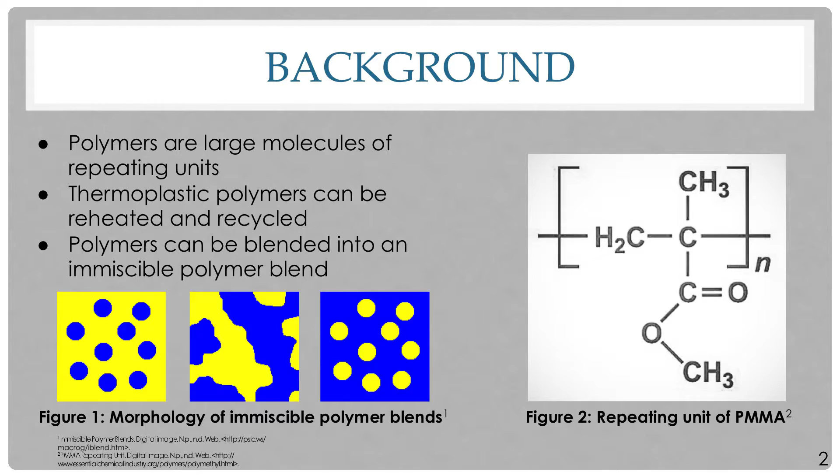The reason we chose to use latex paint for our polymer blend is because with an estimated 17 to 35 million gallons of unused paint left over each year, paint is the single most voluminous household hazardous waste material collected by local governments, and latex paint constitutes 50% of this estimated figure.

Financially, this poses a huge burden on the U.S. Municipalities have to pay a minimum of $8 per gallon in order to properly dispose of waste latex paint into landfills. And if all waste latex paint were disposed of properly, this would cost us about $275 million per year.

On top of this, since many consumers are deterred by the burdensome process of proper disposal, which consists of leaving the paint out to dry and making sure that no children, pets, or wildlife get to it, latex paint is often improperly disposed of into storm drains and bodies of water. This poses huge environmental concerns because the toxins and pigments found within the latex paint are extremely harmful to fish and other aquatic life.

As such, the purpose of our research is to mitigate the negative effects associated with the disposal of waste latex paint, while simultaneously creating a cheaper alternative to pure PMMA by creating an immiscible paint PMMA polymer blend.

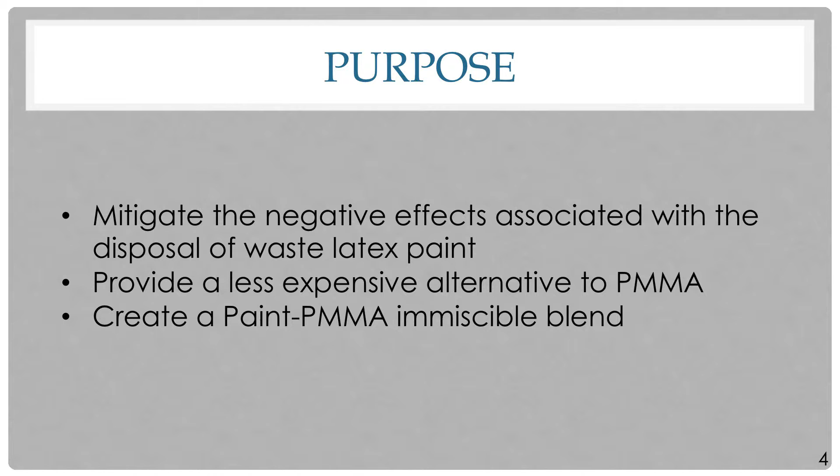We began our research by preparing the latex paint and the PMMA for injection molding. The latex paint was first collected from paint collection systems and then was ground into flakes. The latex paint was then put into a vacuum oven at 25 degrees Celsius for 24 hours. The PMMA, on the other hand, was already in the form of granules, and it was placed in a mechanical oven at 85 degrees Celsius and was run for 24 hours to remove any water molecules that may have been absorbed.

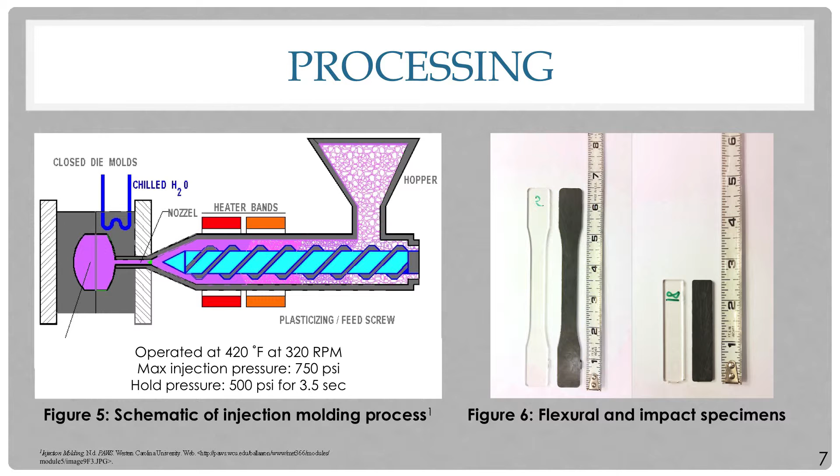The injection molding process is used to mass produce plastics of various sizes, shapes, molds, and designs. This process was run at 420 degrees Fahrenheit and at 320 RPM to produce our flexural and impact specimens. Using the flexural specimens from the injection molding process, we ran a 3-point flexural bend test following the ASTM D790 standards set by the American Society for Testing and Materials.

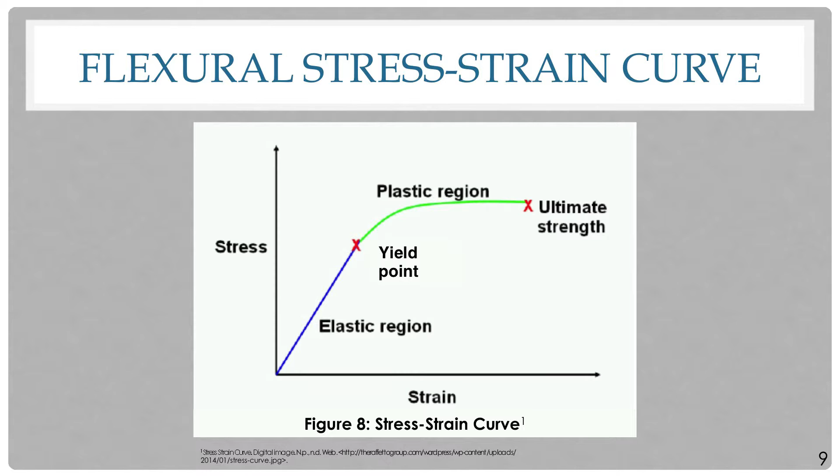Also in the elastic region, elastic deformation occurs. This is bending that occurs as a result of a load being applied to a polymer. But when the load is removed, all bending will fully recover. Past the yield point though and into the plastic region, plastic deformation begins to occur. This is not recoverable regardless of whether the load is removed. The polymer can still withstand some stress and strain though before ultimately reaching fracture point.

The next test we performed was an Izod impact test based on ASTM standard D256. We prepared our specimens by notching and measuring them, and each sample, of which there were 2, was composed of 10 specimens. In order to perform our impact test, we placed a specimen in a vise and swung a pendulum in order to fracture the specimen.

By measuring the speed of the pendulum at each point in the swing, we were able to calculate the energy absorbed by the material during crack propagation. This tells us the impact resistance of the material.

Differential scanning calorimetry, or DSC, is a method of thermal analysis that involves heating a specimen, cooling it back down, and then heating it back up again. We use DSC to determine the glass transition temperature of PMMA. Below the glass transition temperature, an amorphous polymer will act as a glassy and rigid solid, while above its glass transition temperature, it will behave as a rubbery and ductile solid.

In contrast, for the 20/80 paint PMMA blend, we used MDSC, or modulated DSC. The difference between MDSC and DSC is that MDSC includes temperature modulations, and what those are is local temperature oscillations that occur even as the average temperature steadily rises.

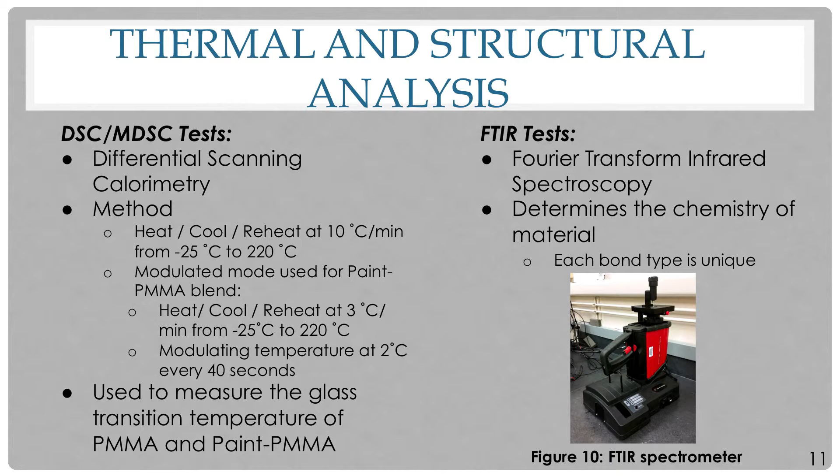Fourier transform infrared spectroscopy, or FTIR, is a method of determining what type of bonds are present in the material. What happens during the test is that infrared light is emitted into a sample. And as this light is emitted at varying frequencies, the percent transmittance is recorded. We use this data to determine the chemistry of the material.

After collecting and analyzing our results, we were able to generate a stress-strain curve for each sample. According to ASTM standards, at least 5 specimens must be tested for flexural testing. For our paint PMMA sample, however, we tested 7 specimens to verify our results because 2 specimens broke as a result of contaminants found in the paint.

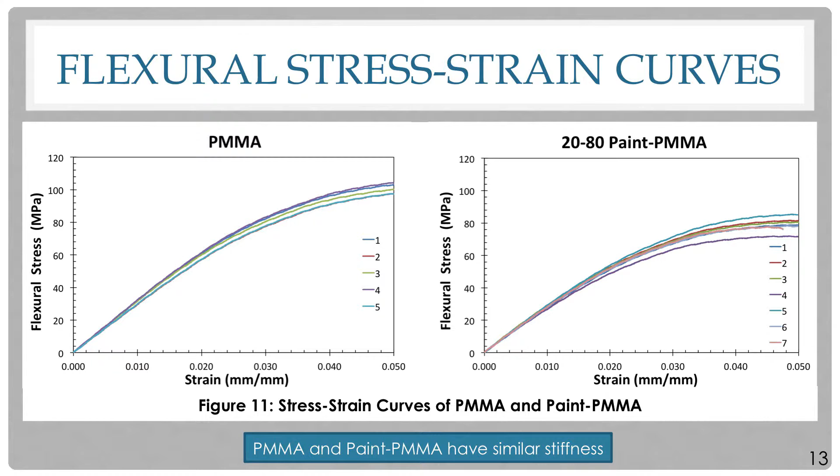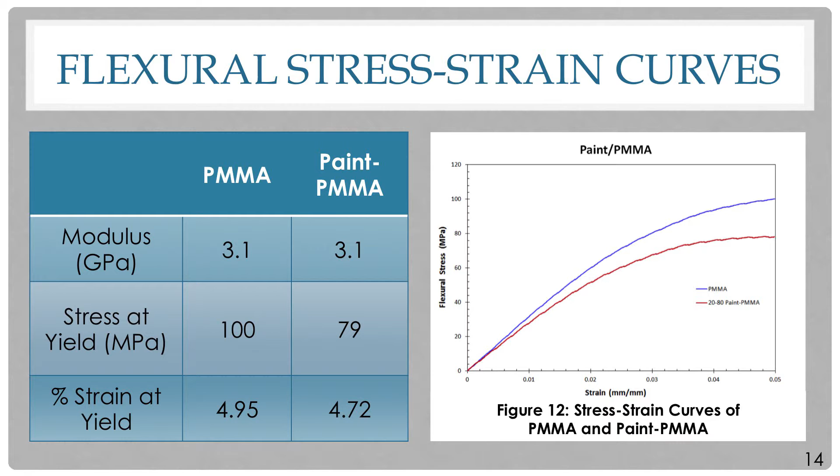If we take a look at figure 12, one representative specimen was selected to best represent our data. At the end of the curve, the stress at yield can be found, which is an indicator of the flexural strength of the material. The red curve, which represents a 20/80 paint PMMA, is actually below the blue curve, which is PMMA, and thus the flexural strength of the paint PMMA polymer blend is less than that of the PMMA.

Transitioning to the table, the modulus of elasticity is shown. Modulus of elasticity is an indicator of the material's stiffness. Since both values are the same, 3.1, the stiffness is retained in the polymer blend, even though a waste latex paint was incorporated in it.

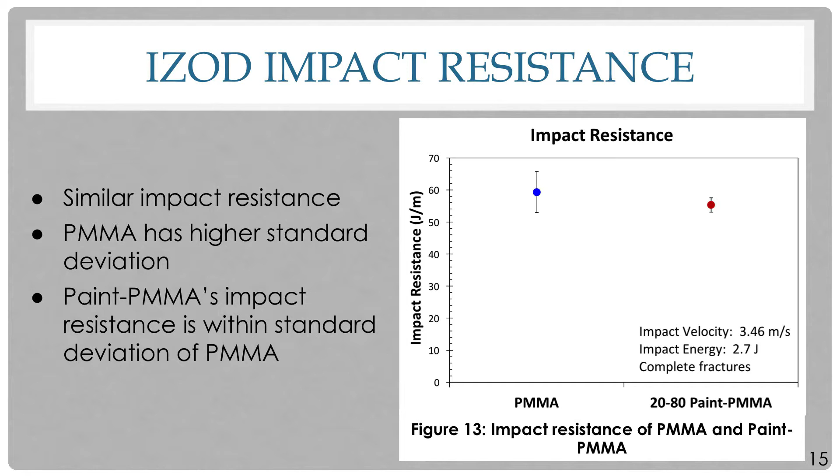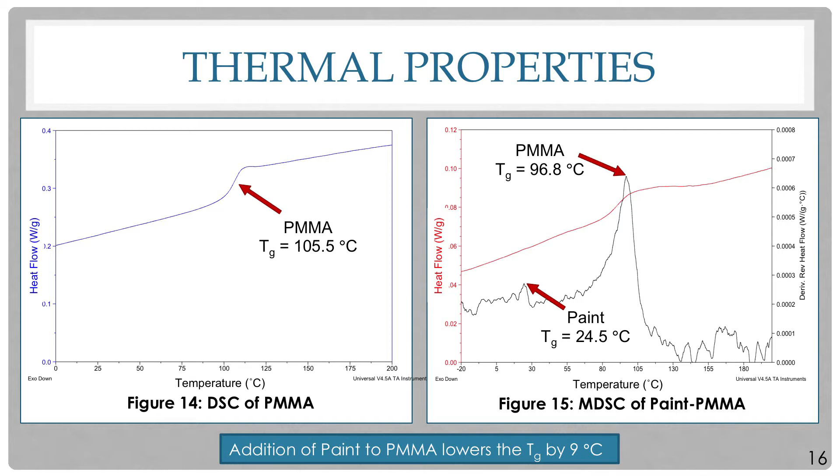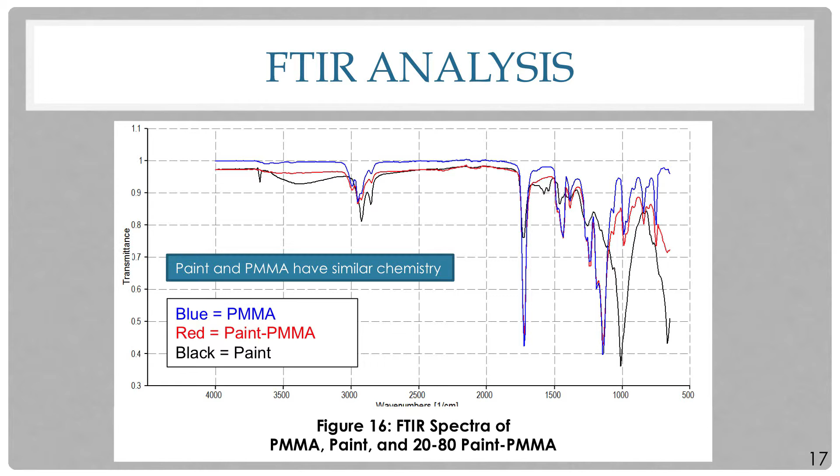The FTIR results of latex paint and PMMA showed that they had similar bonding, which makes them a good candidate for forming an immiscible polymer blend. Secondly, you'll see that the red line is the paint PMMA, and it has characteristics from both of the original materials, latex paint and PMMA, which shows we did in fact achieve an immiscible polymer blend.

Finally, not shown in this graph, across 3 samples of the 20/80 paint PMMA polymer blend, using FTIR analysis, we determined that we had consistent composition and good mixing because all 3 of the FTIR spectra were very similar.

So here's just a summary of the significant results that we got from each test. From flexural, we found that both the paint PMMA and PMMA shared roughly the same amount of stiffness, but the PMMA did have a higher stress at yield. This is perfectly fine though, because our blend is created from a waste material, and so it doesn't need to necessarily match the properties of pure PMMA.

For impact testing, we found that the impact resistance of the paint PMMA blend was within the same region of the PMMA. And this may even increase if we can somehow find a way to filter out the contaminants prior to molding. From thermal analysis, we found that adding the paint into the PMMA lowered its glass transition temperature by about 9 degrees Celsius.

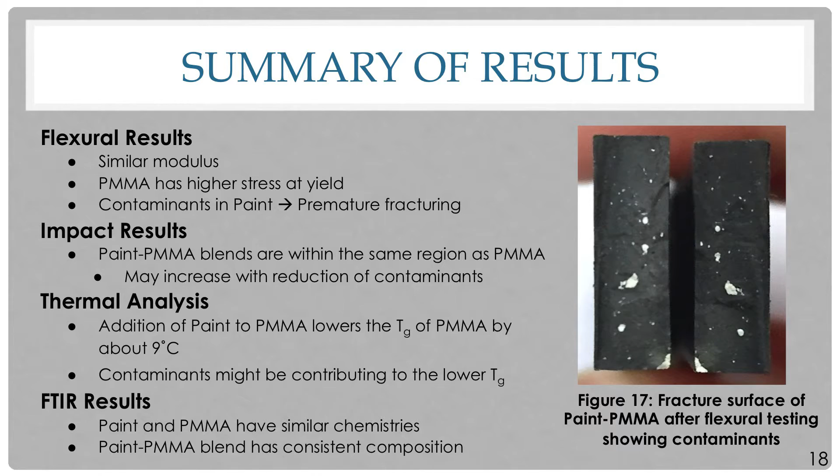And contaminants may also be a contributor to this lowering. Finally, from FTIR, we found that the paint and PMMA both have similar chemistries, which make them good for the blend. And the paint PMMA blend that we created has consistent composition. So we set out with our research to create and determine the properties of a 20/80 paint PMMA polymer blend, which we were successfully able to do.

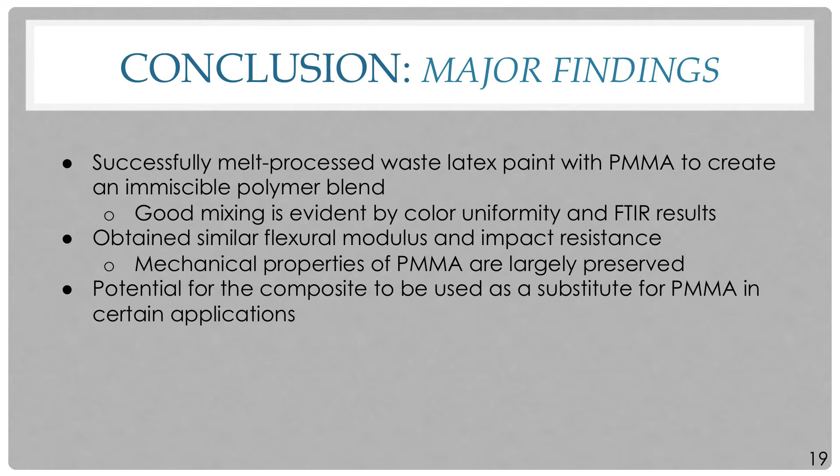For one, we melt processed the waste latex paint with pure PMMA to create our immiscible blend, which was evidenced by the uniform gray color we achieved throughout all of our specimens, as well as the consistent results we got from FTIR testing. From our research, we also obtained very similar values for flexural modulus and impact resistance, which shows that despite the addition of a waste material, that being the latex paint, many of the mechanical properties of the PMMA were largely preserved. This has positive implications for future use because the similarity of the two materials' properties means that paint PMMA can be used as a cheaper alternative to PMMA in many of its applications.

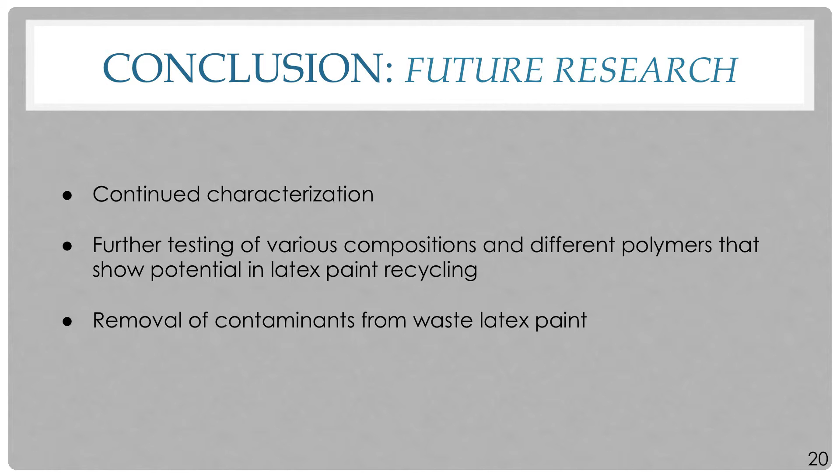However, further testing and analysis needs to be performed in order to better understand the characteristics of our composite. In addition, further tests need to be performed in order to see how paint acts with other polymers and in other ratios to see what kind of polymer blend is the most efficient for recycling waste latex paint. Finally, further tests need to be performed in order to determine what is the most efficient way of removing the contaminants from the latex paint so that the composite's mechanical properties are not compromised as a few of our specimens were.